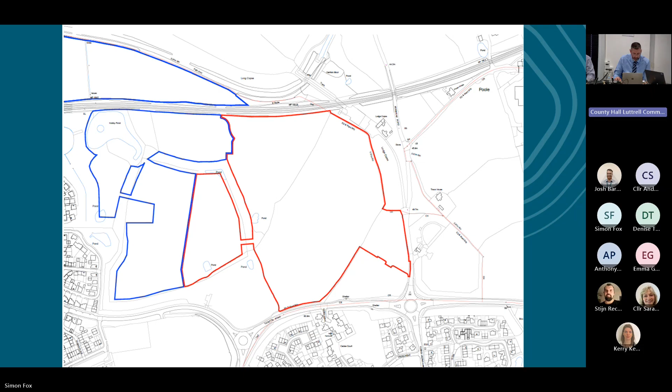So this is the application site. You'll recall the site known as Longforth, north of Taunton Road in Wellington - this area here, the train station site. This was the red line, bordering Nynehead Road and Taunton Road, with a small inset where the supermarket is now located. This was the master plan showing the supermarket, with its vehicle access from Nynehead Road, and the field retained as part of the proposed, now confirmed, railway station for Wellington.

At the time this application was submitted and resolved to approve by the planning committee in May of last year, the council was still progressing at pace to form its case to the government for train station funding. A planning commitment would read well in the government's consideration of whether Wellington should receive its funding, so the application was determined against that backdrop as a corporate priority - the station is of significance to the area. One of the main aims of the planning application was to deliver an access from Nynehead Road to the station site, which is a field or two away. So the delivery of the Spine Road, and its early delivery, was an important factor in approving the outline application.

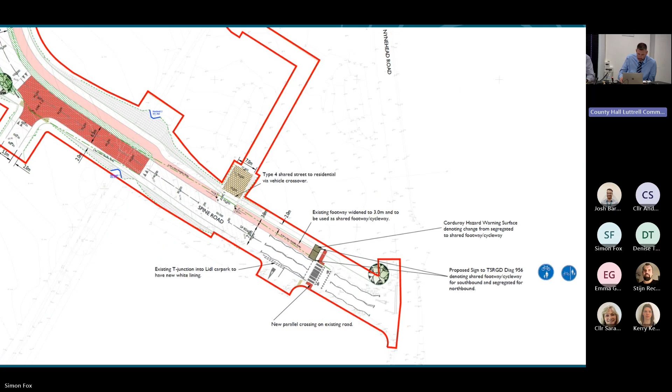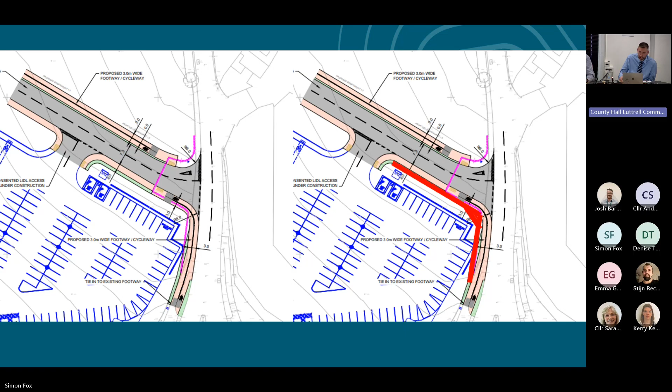So I'll just show you, this was the Spine Road application. This just shows the comparison of the small amount of land on the inside of the bend that we actually require, illustrated in red on the right hand side.

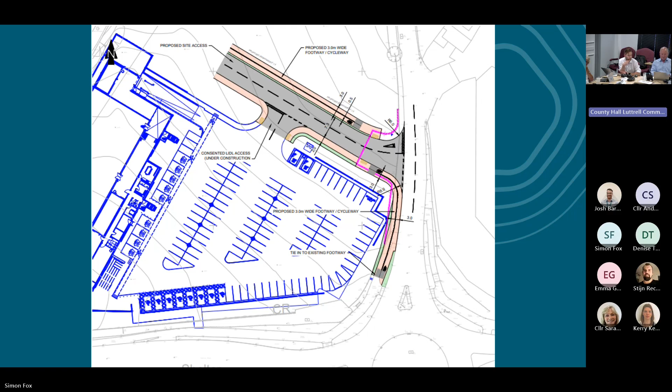We're also satisfied with the works that will be done by Lidl in relation to improving the section of road heading west up towards the site, which will be brought up to an adoptable standard. This will allow the Highway Authority to adopt the main spine road, and by virtue, the development itself once it comes forward as part of the scheme. If we couldn't adopt that section of road, the whole internal layout of the spine road and site wouldn't be able to be adopted by the Highway Authority. We're now satisfied those works can be undertaken, and they will be undertaken in the coming weeks. The junction is suitable and can be used as it stands at the moment.

I understand the concerns from the parish council in relation to this matter. As you know, we did do our best to try to secure the alternative access arrangement as part of the application put before members in May. I come before you now to say that alternative arrangement is not necessarily something that can be done, but the emphasis to members is that the access arrangement currently there is suitable and has been robustly tested to take that traffic.

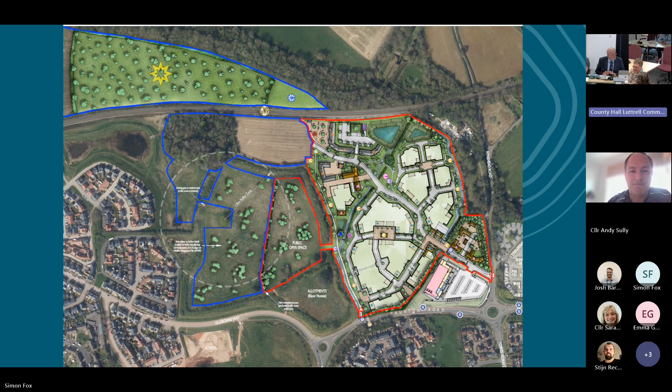Okay, so Stephen, I'm going to go back to your proposal. Are you still happy to propose this? I am, Mr. Chairman. So, as suggested, we have considered it, and we believe that the land promoter has demonstrated adherence, and we are asking that our comments be noted, particularly in relation to further safety works at that junction.

And that the matter then be delegated to the head of planning to determine under delegated powers, with a separate note and a 6 month report to come back, to show where the safety improvements have been made.

Okay, John? Yes, yeah, yes, okay, fine. I just want to make sure you didn't feel you'd just been painted into a corner. Okay, okay, well, yeah, all right, it's fine.

We've had it proposed. Is there a seconder for this proposal? Thank you, Councillor Faber. Okay, can I see those in favour, please?

No. Are you abstaining, Will? Yep, you're going to abstain. Will's going to abstain. Everybody else is... did you abstain? And Nick, and you. Sorry, my apologies, Nick, I missed your hand. My apologies.

Okay, thank you very much for that. We're going to move on to our second item today, which is application 53/24/006, land west of Dene Road at Cotford St Luke. There's an application for outline permission with all matters reserved except access, for the erection of up to 80 dwellings with associated access, road, footway, cycleway provisions, open space, allotments, landscaping, surface water retention and ancillary works. The presenting officer is Anthony Pick. Anthony, good afternoon and welcome to the committee. When you are ready, thank you.

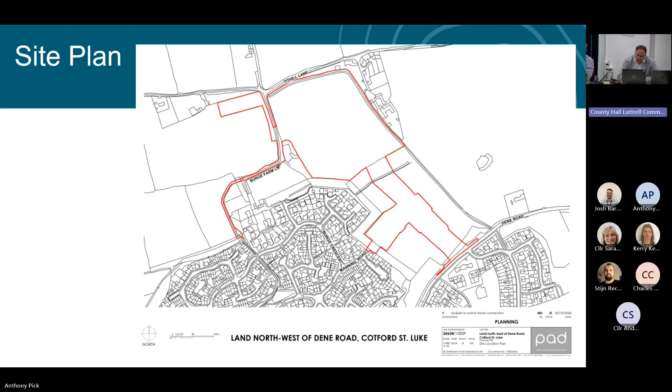This application is for a residential scheme for 80 dwellings. The following slide shows the red line of the application site. The residential area is to the north, with allotments to the northwest, and the red line shows the access through a consented scheme that came to committee a couple of months ago for the reserved matters. Some aerial context: the village of Cotford St Luke, the scheme where you had the reserved matters application recently, the application site, and then the allotments in the corner.

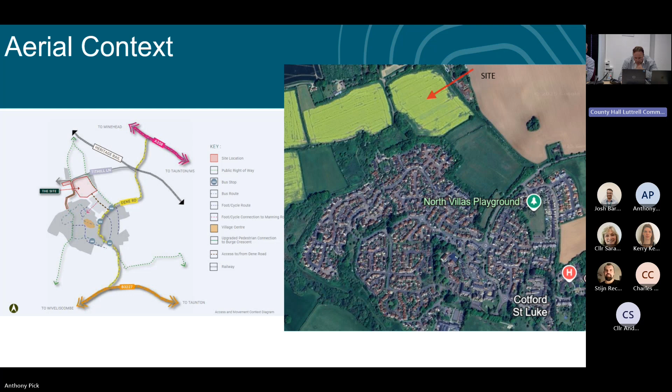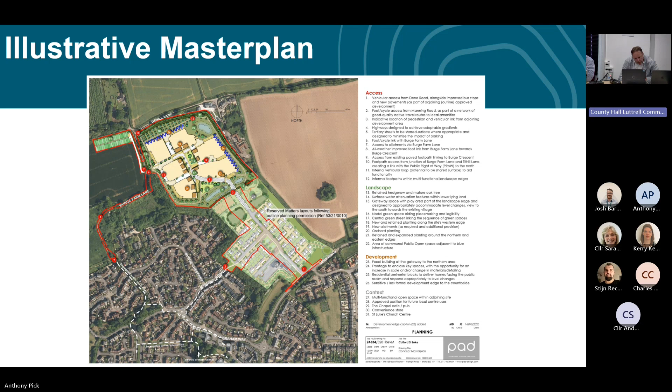This outline master plan shows a concept for how the scheme came forward. What will be conditioned as part of the outline approval is a set of parameter plans. We've got the access, main vehicle access through the middle of the site through the consented scheme, and connections through to Manning and upgrades to Burge Farm.

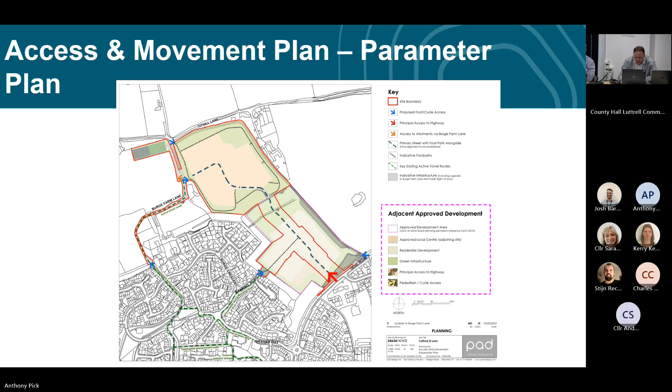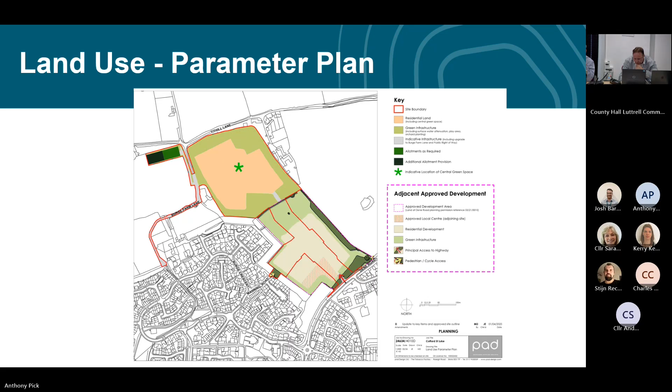The land use plan essentially shows the residential site, green open space in the middle, public open space and landscaping around the edge. And again, more of a green infrastructure plan showing the SUDS scheme, existing vegetation, and tree planting orchard.

Some aerial context photos taken from the applicant's design and access statement, just to show the context of the site. So, the Village of Cotford St Luke, the consented scheme, access through to the application site, pedestrian links, and the Burge Farm Crescent upgrade. In this field here, we've got the allotments for existing and future provision, as shown in the photograph.

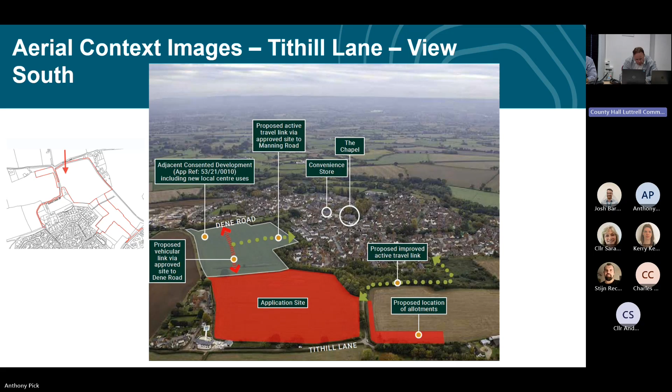Just a slightly different perspective, looking back at the application site. You can see Village of Cotford, and then the connections into the existing established core. You've got the Co-op and Chapel Cafe in the middle, within walking distance, with public transport along Dene Road.

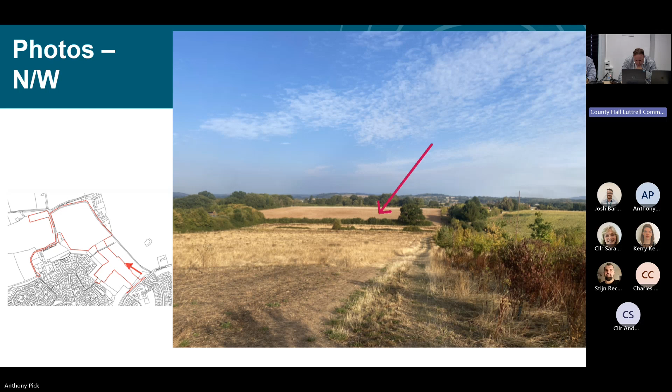A few photographs within the site now. This one is taken from just inside Dene Road from the consented scheme, showing existing vegetation and the application site. You've got the drainage scheme on the consented scheme, and then residential, which you can see to the north there.

Another picture of the application site, just a different season, so not so much grass, but looking across to the existing properties in Tithill Lane - you can see on the horizon there, where those tall trees are.

A couple of photographs of Burge Farm Lane, so highway on the left, and then it goes into a footpath which connects back into the village.

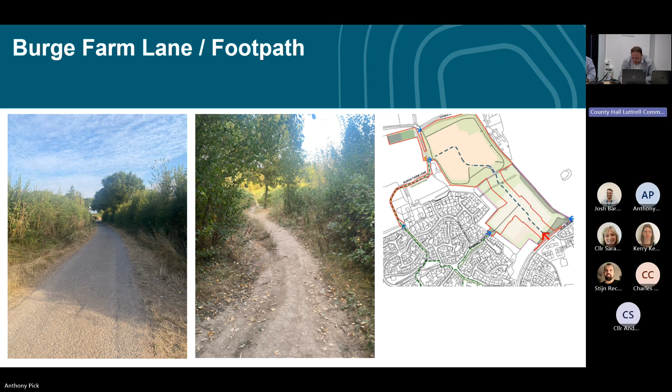The key considerations: it's an outline application for 80 dwellings, of which 25% will be affordable housing. It's a non-allocated site, but it is adjacent to and integrates with the consented scheme allowed at appeal. Currently the council cannot demonstrate a 5-year land supply, so the NPPF tilted balance is engaged. Benefits of the scheme include housing delivery, affordable housing, and biodiversity enhancements which go beyond the 10% requirement.

Community infrastructure benefits are considered to outweigh the adverse impacts of the scheme. Matters such as design, scale and appearance, layout and landscaping are reserved matters, which will be informed by the quality review panel. It will go back to QRP twice before it comes back in as an application for reserved matters. So the recommendation is one of approval, subject to the conditions outlined in the report.

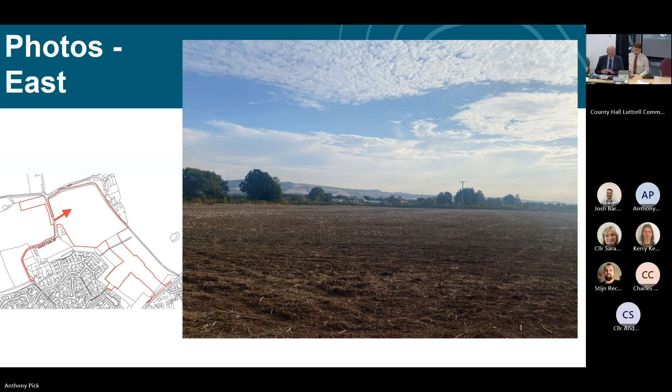Thank you, good afternoon. My name is Hal Parsons, I work for Hallam Land, who are the applicant for this scheme. Our proposal is for 80 high-quality sustainable homes, new areas of public open space, and an extensive allotment provision, and it has been recommended for approval by your officers.

This new scheme is a logical next phase to follow the adjacent development being brought through by Lovell, which was a Hallam promotion approved at appeal in 2023. As members will no doubt be aware, the former Taunton Deane area is unable to demonstrate a 5-year supply of land for housing. This application offers the opportunity to approve a well-thought and considered scheme in a location already found by an inspector to be sustainable.

Not only will the proposals assist in restoring the housing land supply, but the additional 20 affordable homes that will be delivered are a huge benefit. Since the adjacent development was considered three years ago, the number of households on the register in Somerset has concerningly increased from 11,387 to 12,773.

Moving to technical matters, there are no technical objections to this proposal from internal or statutory consultees. There is no objection from the Parish Council, and there have been just 12 public objectors, which by major housing proposal standards is extremely low.

The scheme will adequately mitigate against its impacts and contribute to community infrastructure. This includes approximately £1.48 million in CIL monies, of which up to 15% will be paid to the parish council, approximately £244,000 towards education provision, £38,000 towards NHS primary care, over £23,000 towards youth facilities or a skate park, and legal obligations for 10% biodiversity net gain and phosphate neutrality.

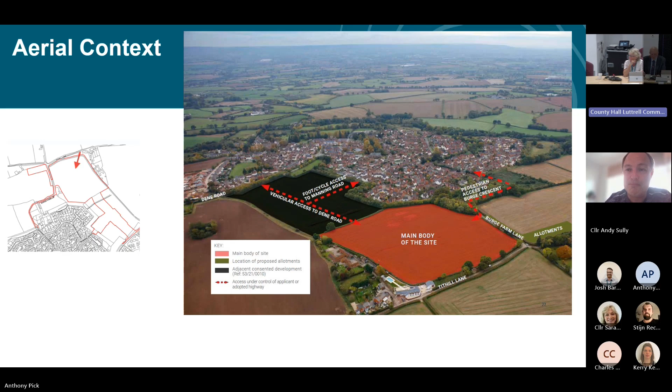Thank you, Councillor Sully. Stephen Buckley. Thank you, Mr. Chairman. I'm always very attentive to and mindful of comments of local members, and I think it is striking that both local members this afternoon have expressed their support for the application. I'm sure the points raised by Councillor Ellis and others are absolutely right, and they can be added as informatives, which I would welcome.

But with that addition, I would like to propose the recommendation. Thank you. Sorry, Chair - would you mind if I just propose that we include a comment to the fact that, as we appreciate this is an outline application, some of the recommendations within section 3.1 have got financial figures in them. It was just to include a proviso for either indexation or an increase in those sums within the 106, just so that it catches.